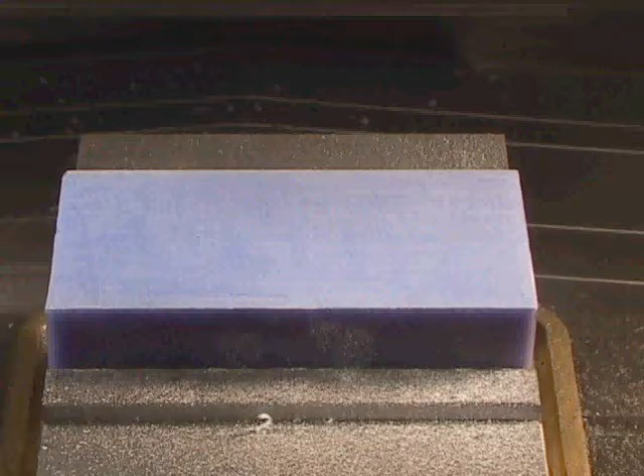I'm standing in front of a Fryer 3-axis CNC milling machine. This is a large machine. I'm standing 10 feet away just to soak it all in with this camera. We'll be examining different parts of the machine right now.

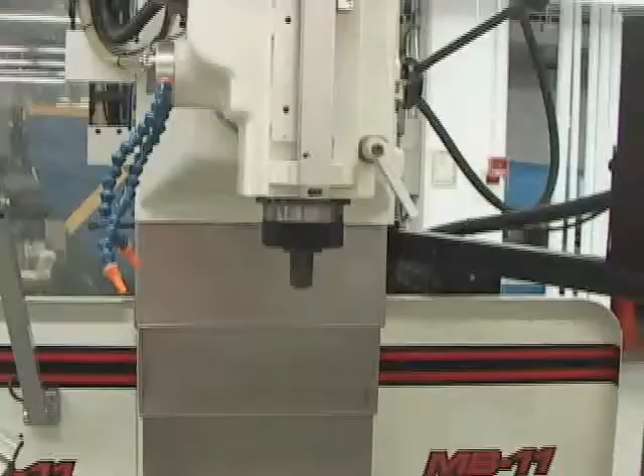This is the spindle where the cutting tools are mounted. This is the part of the machine which rotates. It's all attached to the Z-axis and it can move vertically up and down. On the side of this spindle is a gray handle which releases something called the quill. This black handle moves the spindle up and down when you want to use the milling machine as a very accurate drill press. Otherwise, you rarely use the quill feature.

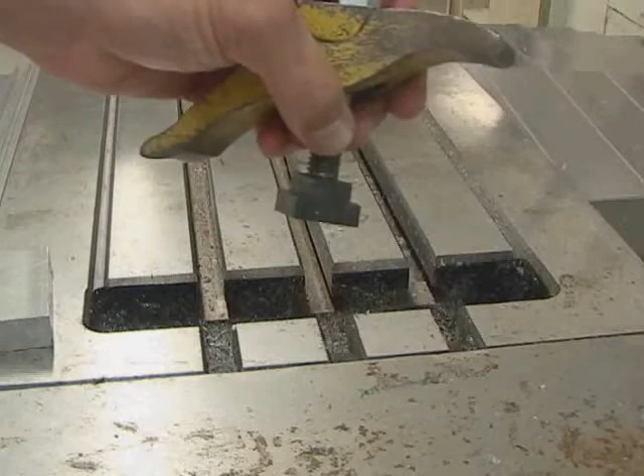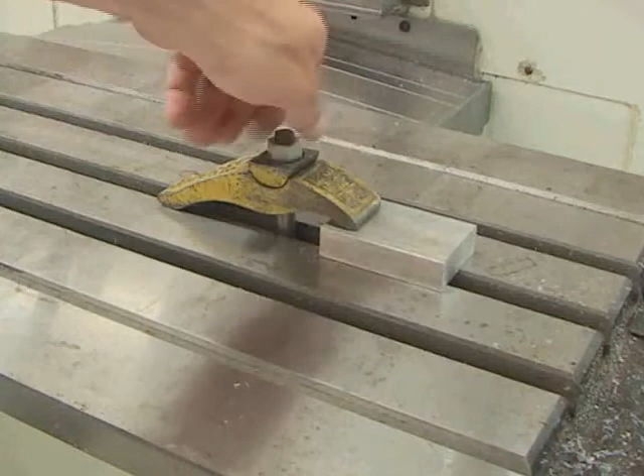When you want to clamp a part directly to the tabletop, you would use something called a table clamp. It's attached to a T-nut, it slides into the slot, and it can be used to clamp down an object. You would need at least 2 of these. Keep in mind, it is possible for the milling machine to cut into its own table. There is no safety feature built into the machine to prevent that. The vise is also a very commonly used device for holding objects in the milling machine, and we will be making use of that all the time.

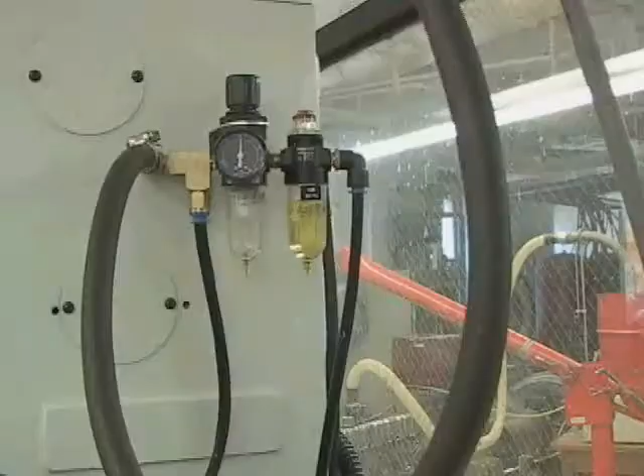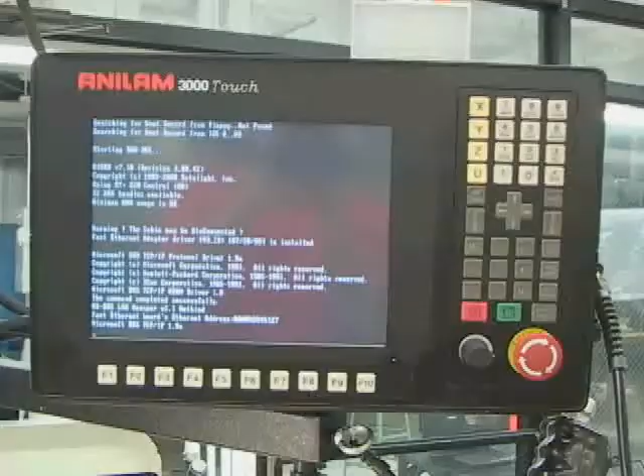In the back of the machine is an oil system which pumps oil to lubricate the ways and bearings of the machine. There is also compressed air used to do tool changing, and of course electricity is the main power source. To turn on the machine, you turn the gray knob in the back and the red knob on the side inside the yellow square. When the machine comes up, the Anilam 3000 touch-sensitive liquid screen powers up. It's filled with many user buttons which we will discuss later.

One of the first things you'll have to do is power on the servo motors. You first have to make sure the emergency stop is not activated by twisting it to the right. It will pop out, and then you push the servo reset button to reset the servos. At this juncture, you will have to hit the home button, the F4 key, and the homing process will take place. Sped up, you will see the Z-axis goes all the way to the top, the Y-axis comes all the way at you, and the X-axis goes all the way to the left. At that point, the machine will read X, Y, Z, 0.

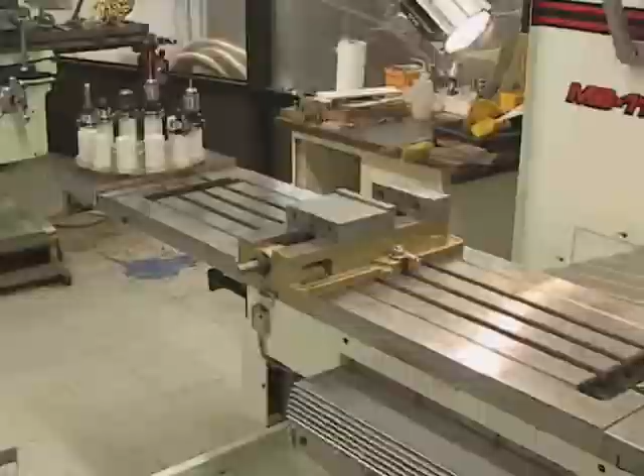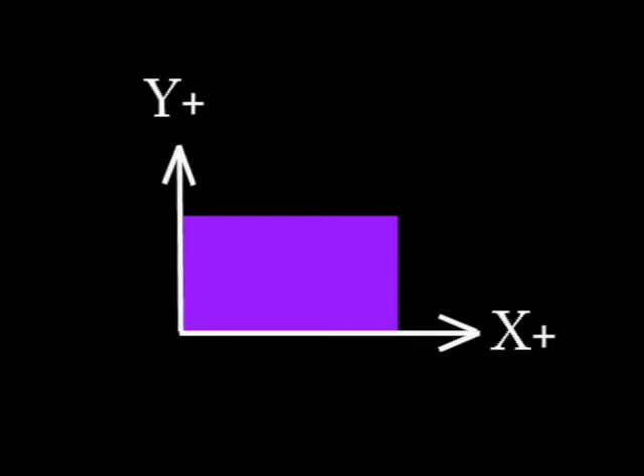Before describing how to actually move the CNC axes, let's keep in mind that the machine is designed so that the table makes X and Y movements, while the Z-axis makes the up and down movements. Thinking of the table moving around is extremely confusing. We will therefore pretend that the table is stationary and the spindle makes all the movements. With this assumption, the familiar Cartesian coordinate system will remain in effect, and these XY axes can be thought of as being directly on top of the CNC table. In this way, your programming will be made much, much easier.

That's a positive X movement. Why? Because the spindle appears to be moving to the right. X negative, Y positive, Y negative, Z negative, and Z positive.

To go over the motion of the machine again, and to show you the difference between line moves and rapid moves, we have zeroed the machine on that corner, and it is now going to make a 6-inch rapid move to the right. Positive 6 inches. Why? Because it looked like the spindle went to the right. Thinking of table movement will drive you crazy. That's Y positive 2.5. And this is a rapid move back to 0, 0.

These moves are made by entering them onto the keypad by selecting rapid and then entering the coordinate you want to go to. This is now a line move from X equals 0 to X equals 6. Remember, the spindle is moving to the right, positive 6. You have to enter a feed rate. Here it is 20 inches a minute. Rapid moves are used to rapidly go with a tool to start cutting, and then you switch to line moves to actually make a milling cut.

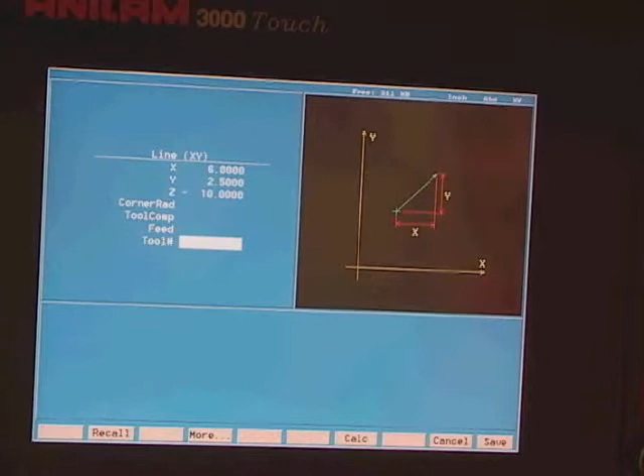I'm now going to enter a line move in 3 directions at the same time. You push the line button and up comes the line menu. I'm going to enter x equals 6, y equals 2.5, z equals -10 with a feed rate of 20. Z -10 will bring the z-axis up because it's right now around -16. When executed, you need to push the execute button.

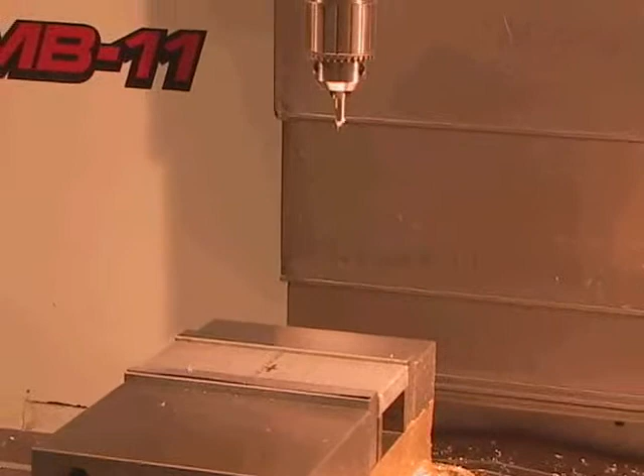The tip of this drill, sped up, will sweep out a space diagonal. It is complex three-dimensional movement like this which makes milling 3D complex geometries possible.

Okay, I just want to show once again using the pulse generator. It's really simple. You click that to the x-axis if you want to move it. With this in 100, every time I move this, it moves 1/100 of an inch. Every time it makes a little click, and you can make very coarse movements with this. If you reduce it to 10, it moves 1/1000th of an inch every time. It's moving very slowly now, and believe it or not, you can move it in 1/10,000th of an inch increments.

The same thing is true for the Y. And if I select the Z, I can move it up and down. This is one of the most useful ways of moving the axes.

This area here, there are jog buttons. Now, jogging in the middle, there is a button that has a hand on it, and that's for hand movement, jogging. I'm going to hit the jog button, and every time I hit the jog button, next to the word jog, it says 1. I hit it again, it says rapid. I hit it again, it says feed. I hit it again, it says 10.

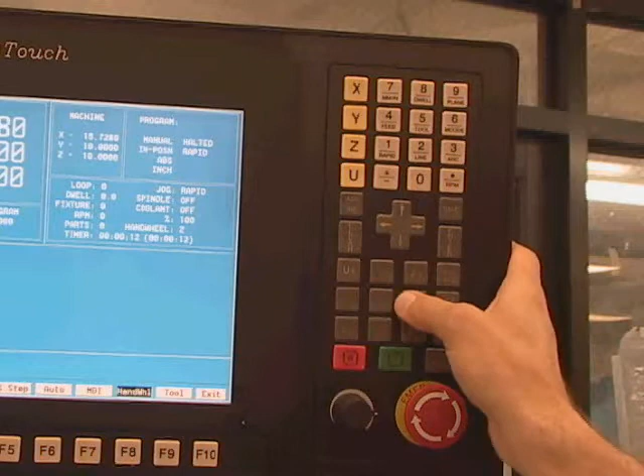Now I'm in inches, and a movement of 1 would be 1/10,000th of an inch. A movement of 10 would be 10,000ths of an inch, and a rapid will just go rapidly. So for example, in rapid, if I hit X positive, it will go positive. X negative, it will go negative.

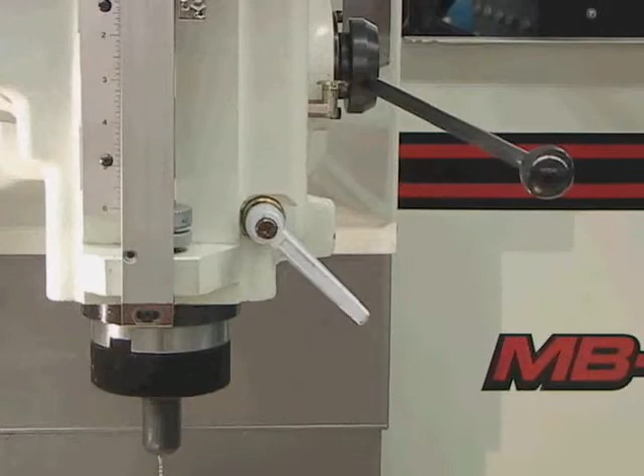Let me discuss how to remove a tool from the machine. The first thing we're going to notice is the quill on the side. The first thing we're going to want to do is to make sure this handle is up and unlocked, and make sure the quill is all the way up. The tool will not come out unless the spindle is all the way up. Now we're going to just lock this down.

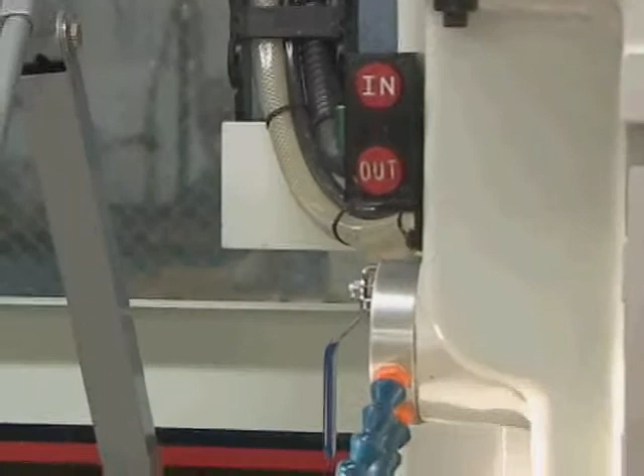The next thing we're going to focus our attention on are these in-out buttons that are located right above the spindle on the left side. Notice there's a green button on the outside and an in and out red button top and bottom. To remove the tool, you push and hold in the green button while hitting the out button. Now you'll hear the air pressure when you do that.

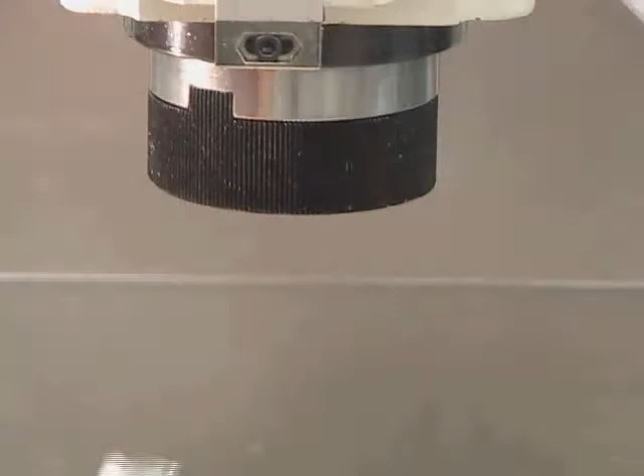Now let's focus in on the spindle. When I hold in the green button and the out button at the same time, the tool is going to come out. I notice that the spindle is dropping there. When the tool comes out, I'm free now to change tools.

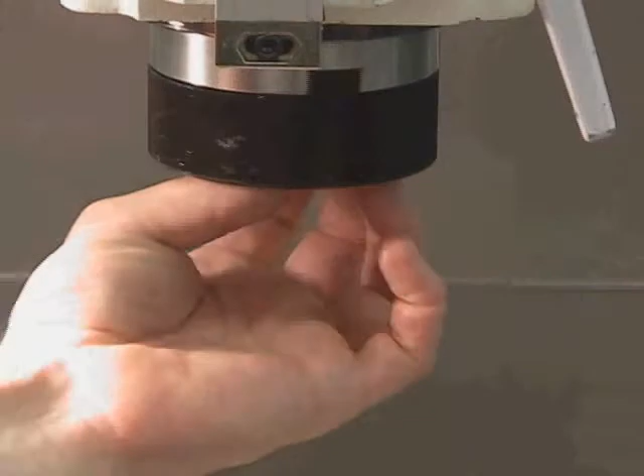Now notice, there are notches here, and in here there are also a corresponding set of notches. Now to put the tool back in, you have to rotate this around until it fits into those notches. Then you hold the green button in until the tool is back in there.

This particular method of tool changing is called the power drawbar system. It is a manual tool changing method. However, it is fairly quick. And the part of the machine that has the power, this is where it is. The power drawbar system, that is the part of the machine which does the tool changing.

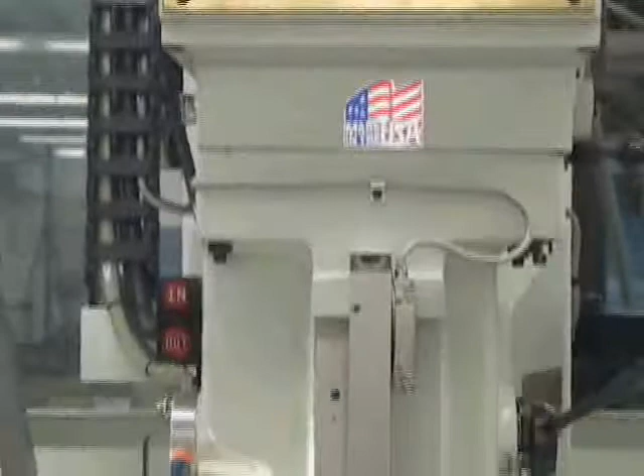Now, you're probably all familiar with the vise, but this particular vise has this handle that opens and closes the vise. It is held into the table with these T-nuts. Again, we're using T-nuts that have threads coming out of them, and the screws are tightened with the same handle as you would tighten the vise with.

Chips often get inside a vise, so if you're using a vise, it's very important, if you want accuracy, to make sure the inside of the vise is extremely clean. We do have an air gun mounted onto the side of this machine. Here's the air gun. It blasts compressed air. You don't always want to use a compressed air gun, but it can be useful. Never play around with these in the shop class.

Typically, when you use a vise, you would put a piece of metal in the vise like this. However, you never know if the metal is angled this way, or potentially it could be angled this way. And if you want it flat, you use these precision ground pieces of metal called parallels. Now we have sets of parallels. They come in many different sizes. You have to select one that's appropriate to your machining task.

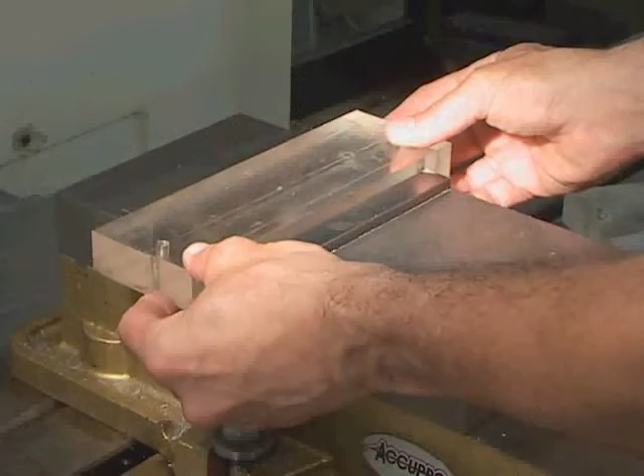Okay, I'd like to describe to you exactly the method by which we're going to make these nameplates. We've created a jig to be used in the production of these nameplates, and this is the way the jig works. It's quite simple. This is the bottom part of the jig, and it's going to go into the vise. Now I just want you to take note of how this one corner differs from the other corners, and I'm going to discuss that in a second. But basically, this part of the jig is going to go into the vise, and it's going to stay there for the entire class.

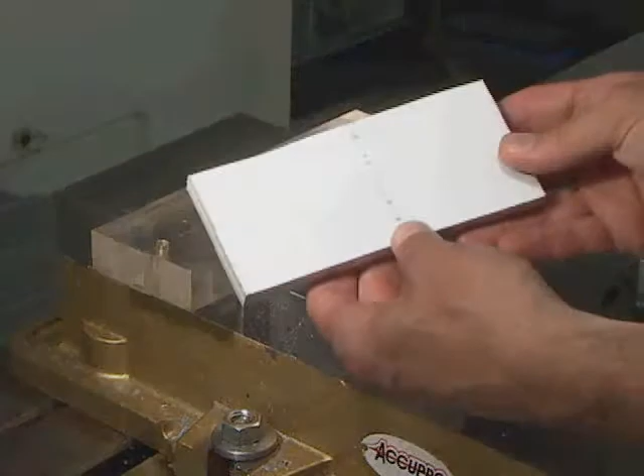The next thing that's going to happen, and I think I mentioned this to you already, is this is the blank. Everyone in your class is going to be given one of these pieces of aluminum. It is approximately 6 inches long and 2.5 inches wide, and it's about 1/2 inch thick. What you're going to do is tap 2 holes, 1/4 by 28 threads, exactly 4 inches apart, directly centered on the bottom of this plate. That's the first thing you're going to do.

And then what's going to happen is this. You're going to screw your nameplate onto the top of this jig. We'll tighten these screws. Then this particular plate with your nameplate on it will be put on top of the secondary plate, and it will be clamped on or screwed down with these screws. Now these happen to be called Allen cap screws. They take a special sort of hexagonal wrench to tighten them, and you've probably seen them before. And these will be tightened like this. Once your nameplate is down on the jig, these screws tighten below the surface of the bottom of the jig.

They'll come down like this, and we will be free to machine all the surfaces of this plate while making your nameplate. So we'll be able to, for example, change the shape of this rectangular block into whatever we want, really. And the only thing you have to appreciate is that to cut all the way around your piece and complete the profiling, we're going to have to cut a little bit into this jig. That's okay, because these screws go below the surface, and they were made to do that. And we won't go too far below, but while we're profiling out your nameplate, we will actually cut into the plexiglass a little bit.

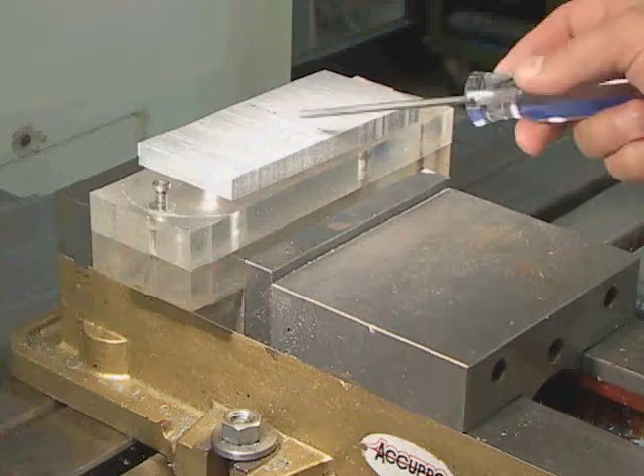Now, the reason why we've made the jig like this is as follows. After you make your nameplate, one of your fellow classmates will want to make his or hers. Now, from this corner of the jig, we will set our 0, 0 of our CNC machine, and everything will be referenced from the same corner. And therefore, when we take out your nameplate and replace it with someone else's, we will not have changed our XY0, and we won't have to go through the somewhat time-consuming task of re-establishing the corner of the piece every single time we change plates. So that's the philosophy of this jig.

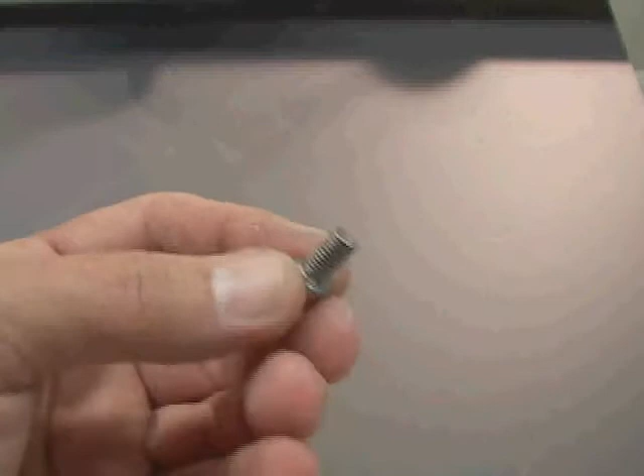Now here are the Allen screws I mentioned that are on the jig. And this is what's going to hold the nameplate down to that upper plexiglass plate on the jig. This is an Allen cap screw. You can tell because it has the hex. It uses an Allen wrench. The hex is in here. And it happens to be what's called a 1/4-28 screw. Now what that means is the screw is 1/4 of an inch in diameter, and it has 28 threads per inch. So if you could count these, there'd be 28 of these per inch.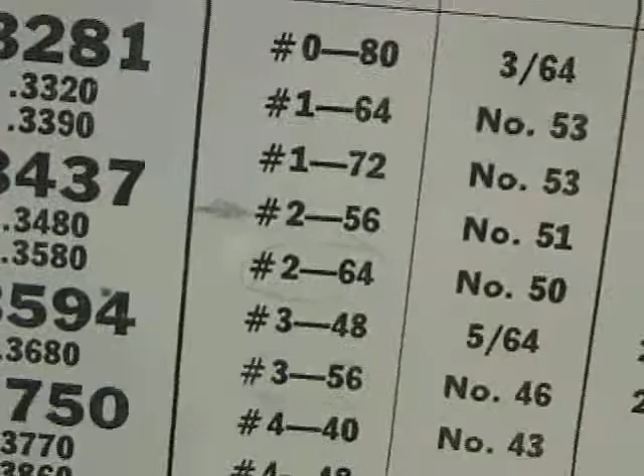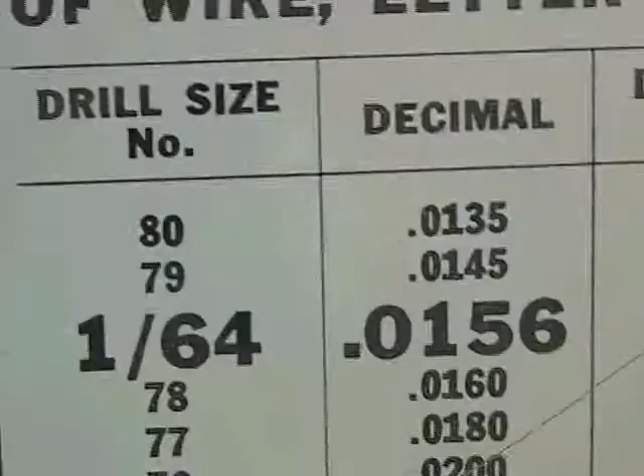We must tap a 1/4-28 hole, and in order to do that we need to determine the drill needed to make such a hole. We consult the drill chart and see that the 1/4-28 hole requires a number 3 drill. This chart also gives you the actual diameter of these drills. Drills are listed as number drills, fractional size drills, and letter drills. All the information you need is contained in the chart, but the important thing to know is we need a number 3 drill, 0.213 inches.

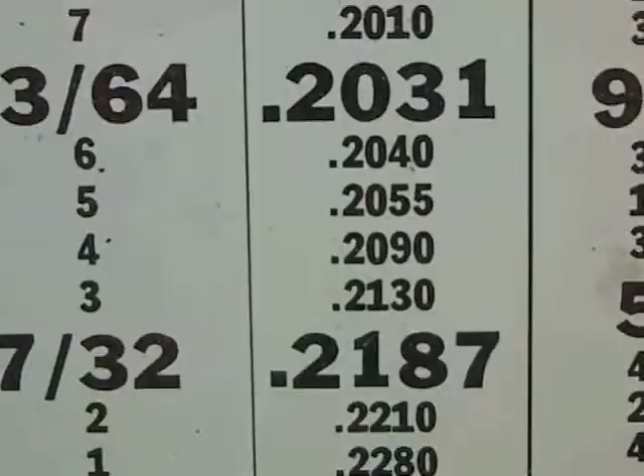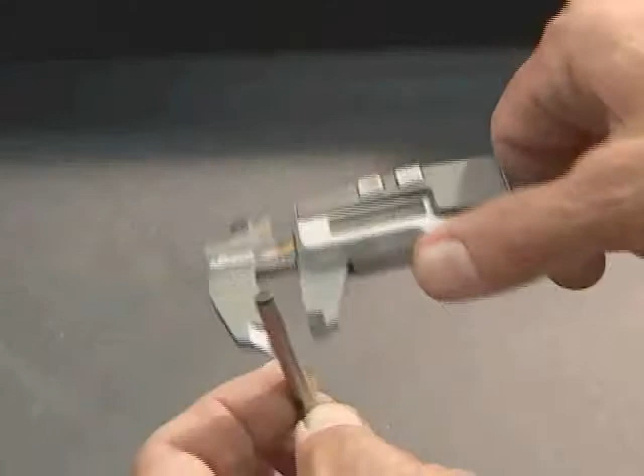But let me just say, when you pull it open, you see the jaws underneath open up. This one's a digital caliper, so it gives you a digital readout. And we can use it to measure the diameter of this drill. So I'm going to grab the shank, and it's measuring about 0.21 here. You can also measure the tip if you want, and it measures about 0.212. Now that we have the caliper out, let me just go over it a little bit.

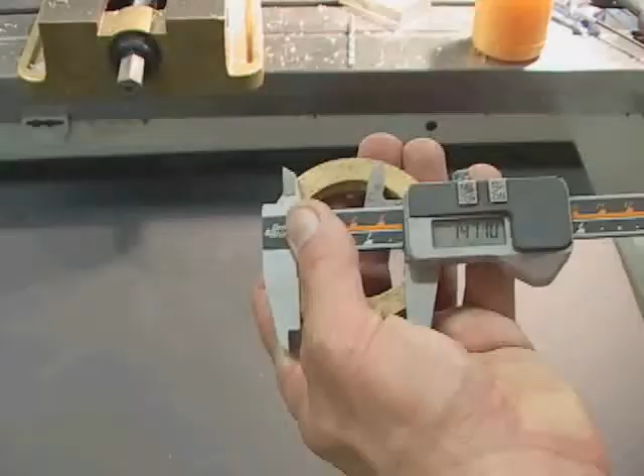It can measure the outside diameter down here below with these jaws, and if you look at the top part, that can be used to measure the inside diameter. On the other side of the caliper, as I pull open the jaw, this rod comes out the bottom, and that can be used to measure the depth of a hole. So this little device here, and this might be how you would use these outer jaws to take an inside diameter measurement. Okay?

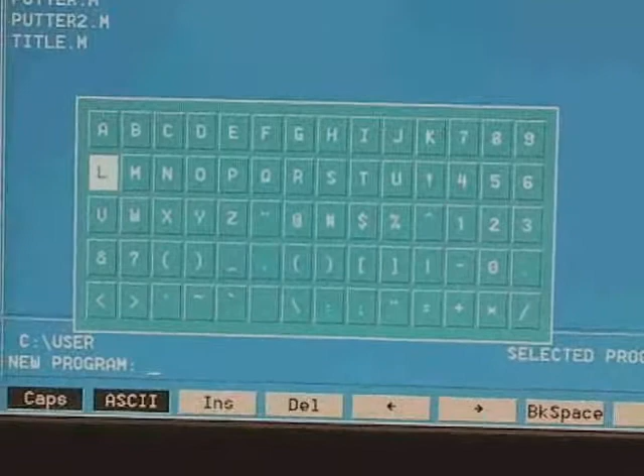To prevent oil from being constantly pumped into the machine, we should turn off the servo motors by pushing Big Red. To write a program, you must hit the Program button, and then hit the Create button, and then the ASCII key. And up comes a little ASCII touch-sensitive keyboard, and you can type in a name of a program. I am typing in the name Drill. After typing it in, you hit ASCII again, and when you hit Enter, you will notice that on the screen will appear your new program, Drill.m.

You must select it with the F6 key, and then hit F4 for Edit, and you can start writing your program. Notice at the very top, the program appears in a very small font size, Drill.m. All these programs have .m's. And below is the last line of all programs, the end of program line. That's sort of a generic line that is popped onto the end of all programs.

The first thing we're going to do is hit the number 7 key and select our units. I'm picking inches. The plus sign will toggle between millimeters and inches. The next thing we're going to do is pick absolute coordinates. Again, the plus sign will allow you to pick incremental, but we will select absolute.

The first thing we're going to do of any significance is a tool change command. When you hit the number 5 key, up comes the tool change command. We are going to ask for tool number 1, and the M code is M6 for tool change. That will be our spot drill.

After making that tool change, I will want to start the spindle spinning clockwise. The M code for that is M3. And after that, I will select the RPM with the period button and select 1000, which is a good RPM for drilling. So slowly but surely our program is starting to form.

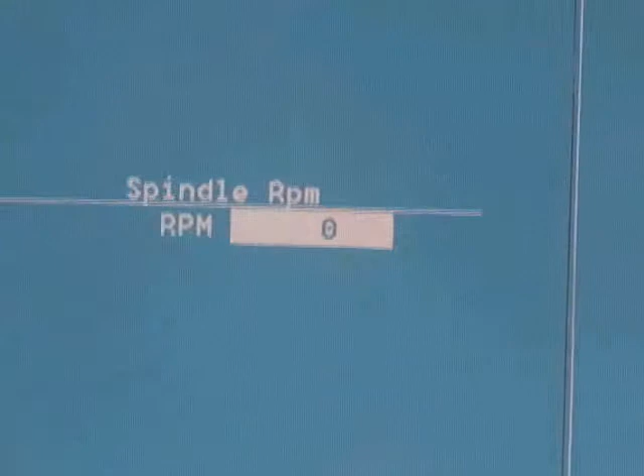After selecting the tool, I'm going to rapidly move to the start point of where I want to drill. So my first hole is at x -2 because the center is 0, 0, y 0, and I'm coming down to the coordinate 0.1 in the z direction.

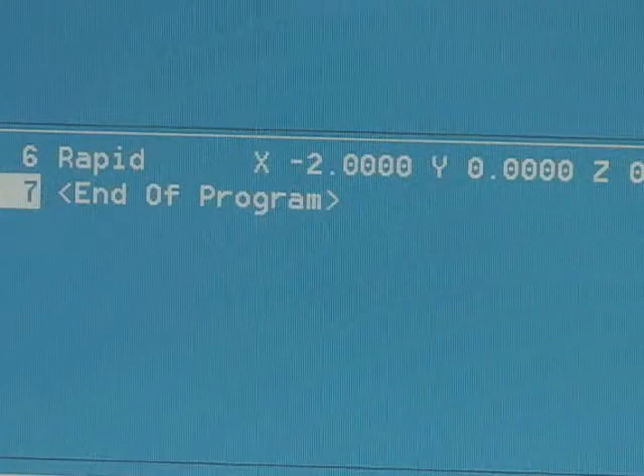We're now in a position to start drilling, so I hit the drill menu, and I'm going to select the kind of hole I want to drill first. That is the philosophy of how this machine works. I select basic drilling because this is a simple spot drill. And there's a little picture that diagrams how the drilling process will go.

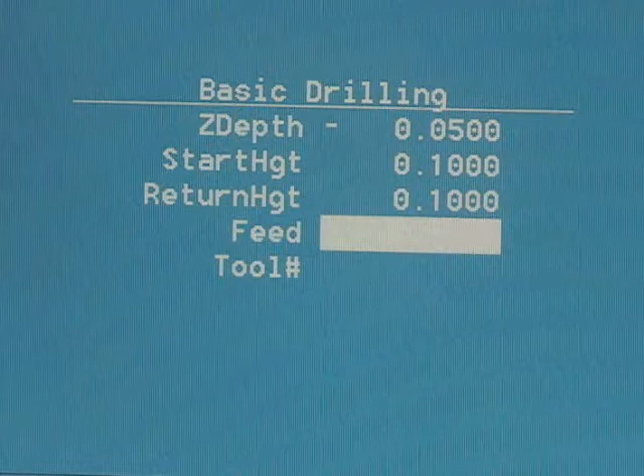We're going a depth of -0.05. Our start height will be 0.1. Our return height will also be 0.1, and we'll feed slowly to be conservative at 2 inches a minute. When we enter this line, all the information will appear.

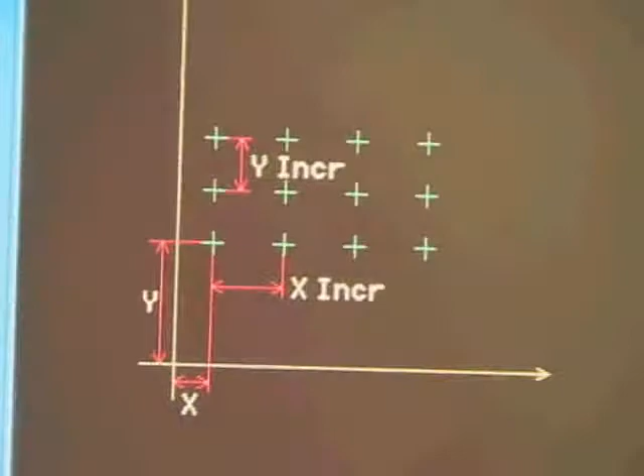The next thing we want to do is re-enter the drill menu, and we will select pattern. Now we only have to drill 2 holes, and I could simply put in the coordinate information of those 2 holes, but to show capability of the machine, we'll bring up the drill pattern menu. And here we are in a position, if we wanted to drill hundreds of holes, but we only need 2.

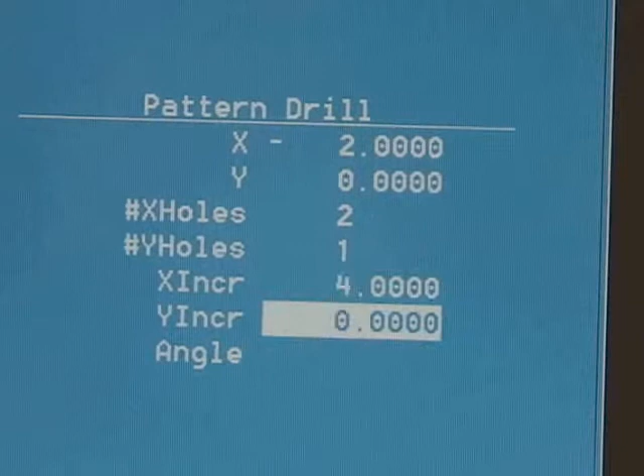Our first one is at -2, 0. We have 2 holes in the x direction and 1 in the y, and the increment in the x direction is 4 inches. So it's kind of a lot of work for 2 holes, but you get the idea.

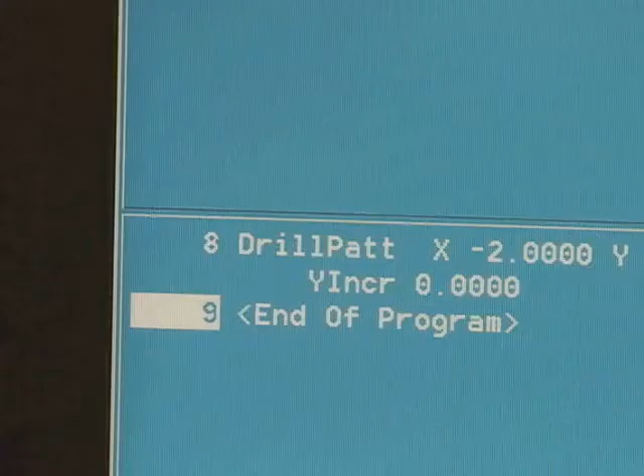After entering this command, we are in a position to check to see if we are programming correctly. Now all the information we really need is there. It's going to do the basic drilling described on line 7, and it's going to apply it to the pattern of holes described on line 8 in our program. And again, that's the philosophy of the machine. To check our program, we'll hit the draw button, F2.

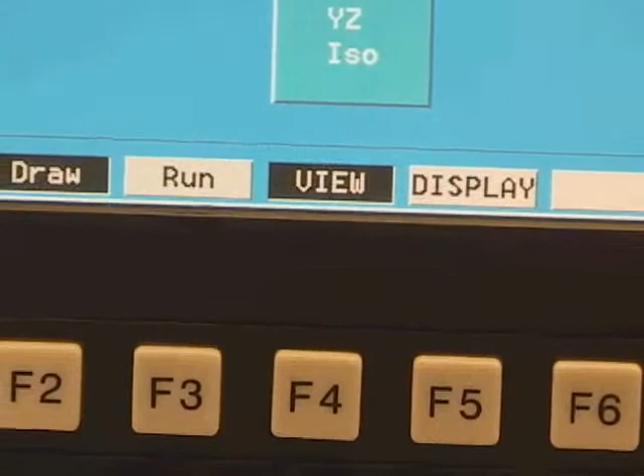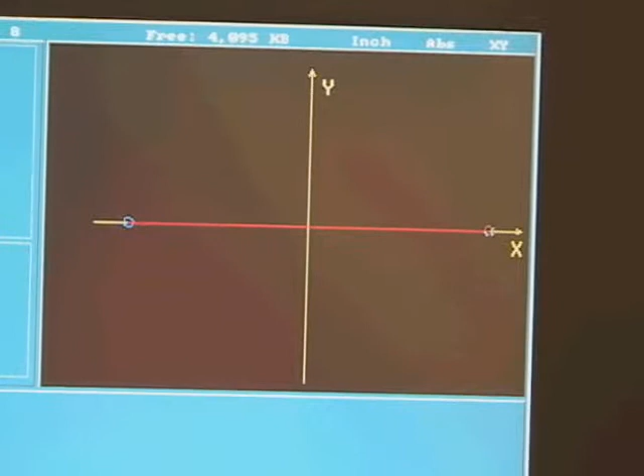Once the draw button is hit, there are a couple of options under the draw menu, and one is to select the view, and we will select the XY plane, which is a top view, and the display we'll hit fit, and up on the screen you can see the 2 holes that will be drilled, one at -2 and the other one at +2.

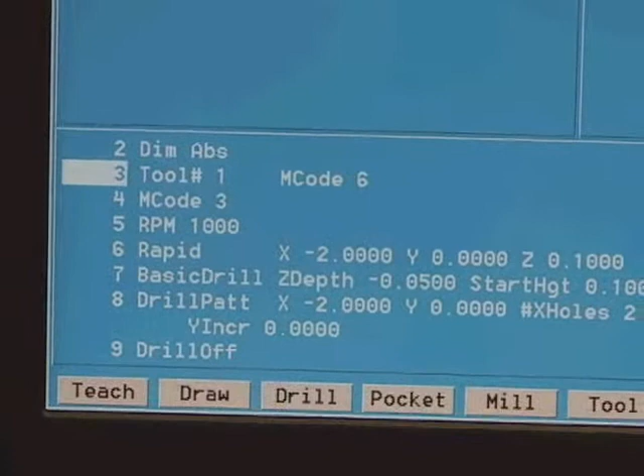The next thing we must do, at the end of all drilling operations, you must enter what's called the drill off command. It tells the machine to stop drilling. So that's necessary as well. Now the second hole is almost exactly like the first hole. So by copying and pasting lines and then editing them, it'll make life easier.

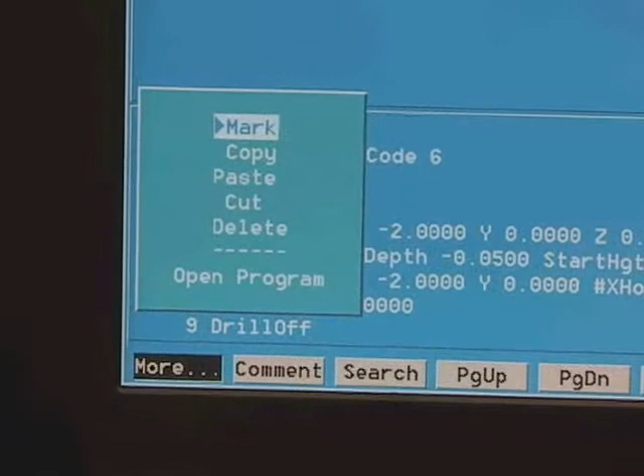Now copying and pasting is a little weird on this machine, so you must get into the menus you've just seen, hit the More button, and bring up the mark line. When you enter the mark line, it will allow you to highlight the lines that you wish to copy. This is somewhat of an archaic programming method, but nonetheless it does work.

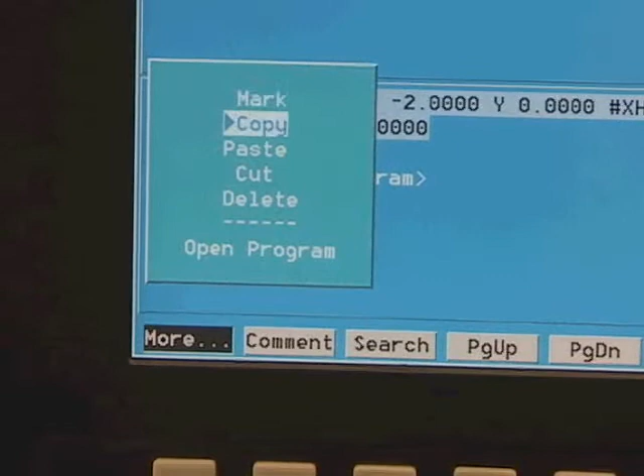We are going to highlight lines 3 all the way down to line 9, the drill off command. We're going to copy and paste it, and then we're going to edit it for our second drilling operation. You hit More again, and it will bring up the copy command. So we'll select copy next, and when you hit enter, notice it says block saved.

Now all we have to do is move the cursor down 1 line, and then we will select the paste command, and all those lines will be pasted above line number 10. So we hit More 1 more time, go down to paste, hit enter, and we have copied the blocks of programming to the next line.

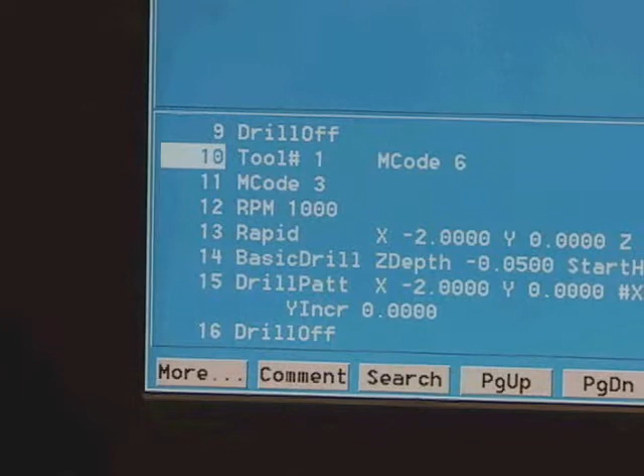So as you can see, you have tool number 1 to the drill off command, and then tool number 1 once again to the drill off command. We're going to enter line 10 so we can edit it, and we're going to change tool number 1 to tool number 2. Now this will be our number 3 drill, which will be used to drill the hole for the quarter 28.

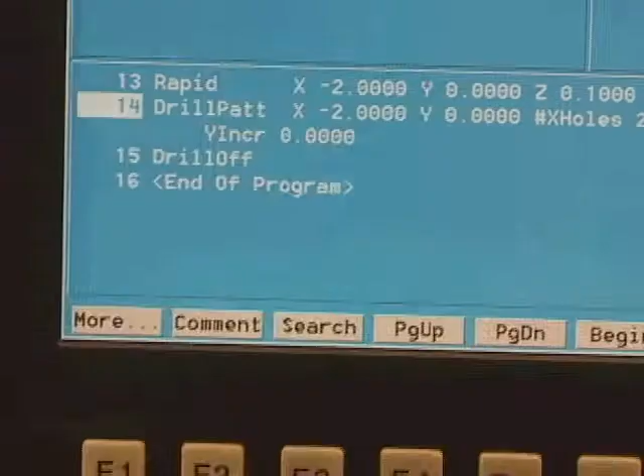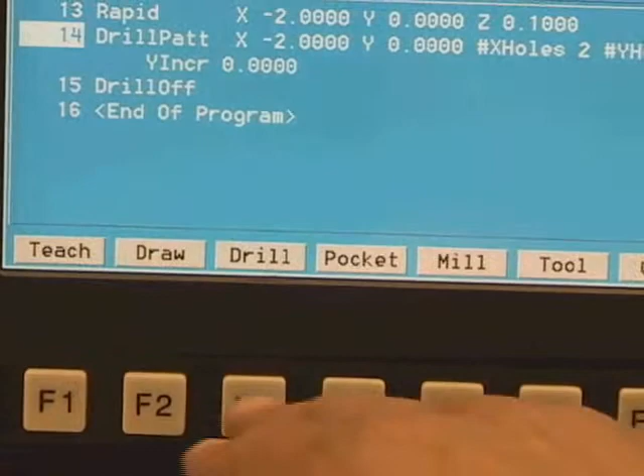Now everything else is reasonably good, but to show the capabilities of the machine, rather than do a basic drilling operation, we're going to use a pecking drilling operation. So I'm going to go to 14 and hit the clear button, and that erases that line. And now I'm going to go back to the drill menu, and this time instead of selecting basic drill, we will select what's called pecking.

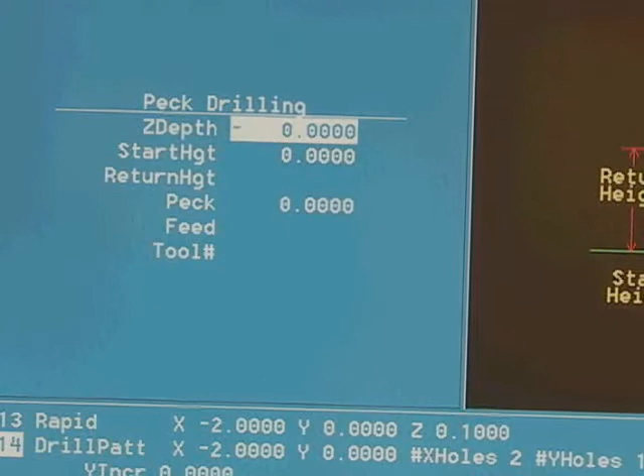Now pecking is a cycle that's normally used for deep hole drilling, and the idea is like a bird pecking at its feed. The drill bit will go down to the depth you program it to, but it will do it in little pecking increments, each time bringing the drill out and clearing the chips from the hole. And I'm entering the pertinent information.

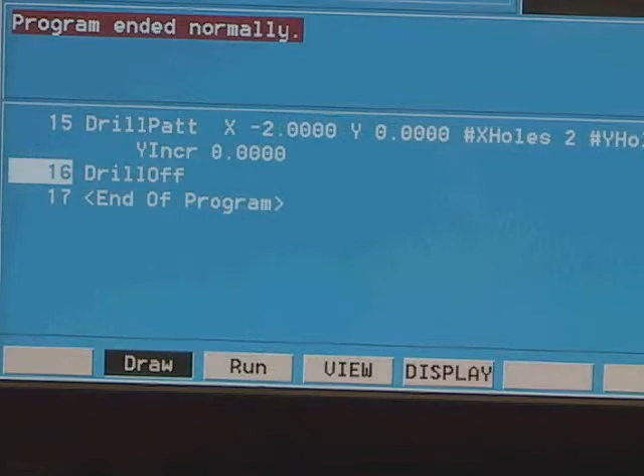We're going down -0.375. The start and return height are the same, and I'm going to pick 0.1 pecks. So it's going to peck 3 0.1 pecks, and then the final peck will be 0.075. So it will make 4 pecks for each hole, which is a bit ludicrous for a piece of aluminum, but again, just to show you the capabilities of the machine. And again, we'll select a feed rate of 2. And basically our entire program is done.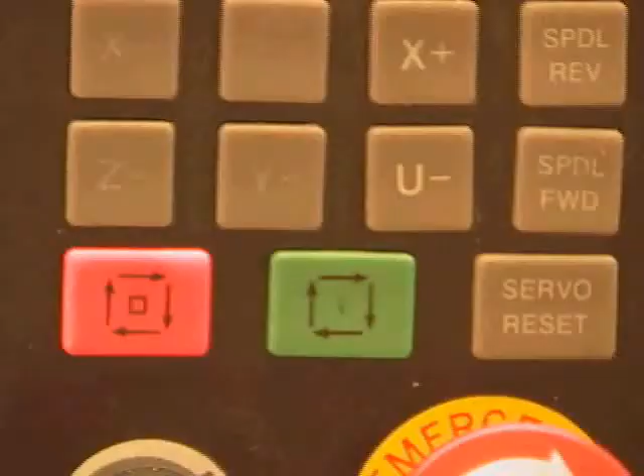Before running our program, it is necessary to obtain the tool offsets. Now when the machine is first homed, the tool that's put into the machine is a fictitious tool called tool number 0. This is where the tool changes are made. Since we are using tool number 1, we now have to switch this to tool number 1. Having switched it by hitting the number 5 button and pushing tool number 1, we have to actually execute this command to make it happen. So we hit the green execute button, and the machine won't move because there was no movement involved, but the tool has been changed to tool number 1.

The next step is to slowly move tool number 1 down until it just touches the surface of the piece of material. I'm using a small piece of paper that I am wiggling back and forth as I slowly lower the tool down. When the paper stops wiggling, I know that I have achieved my surface touch. I now look at the machine coordinates. Now this little box here are the machine coordinates. This is what has to be entered into the tool table.

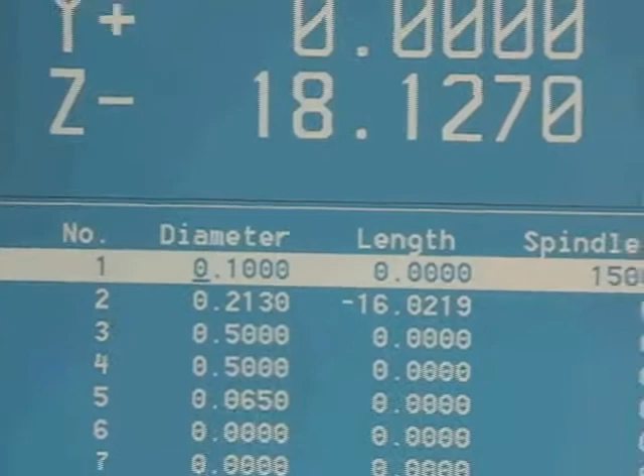You hit the F9 key to bring up the tool table, and in the number 1 line, tool number 1, we must enter the diameter and its length offset. The big coordinate information in the upper left-hand screen, these numbers there, are the part coordinates, but it is the machine coordinates which are crucially important for doing tool offsets. I enter the tool length offset. In this particular example, the two numbers agree with each other, but they typically do not.

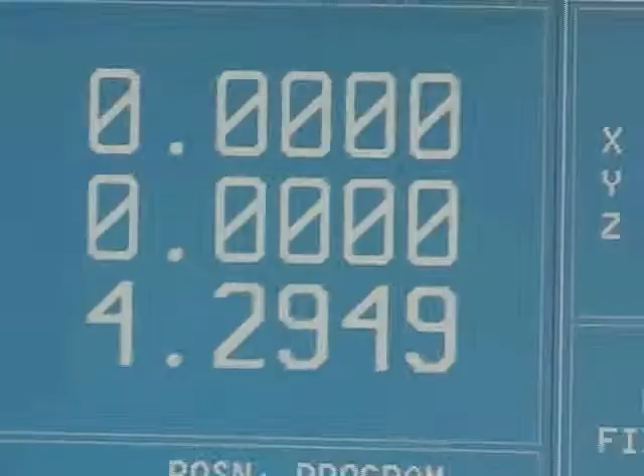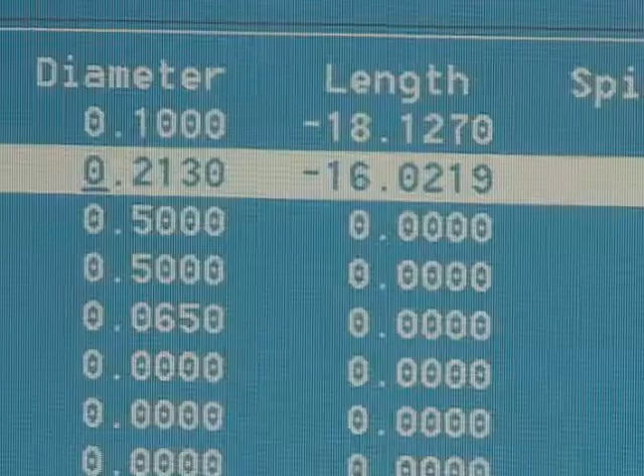Now, we must play the same game with tool number 2. So I enter tool number 2 command, and I'll have to hit execute again after entering this information to make tool number 2 come out. Now we must lower the number 3 drill onto the surface of the material, wiggling the paper as we go. You can either use the pulse generator to lower the Z-axis or the jog buttons, but it must be done slowly and carefully. Once this height is obtained, you must enter it also into the tool table.

Now notice this Z machine is negative 16.022, and the number in the tool table is negative 16.0219. This must be because somebody recently got the offset and it's just off by 10,000th. So we will make it perfect, and we will have completed entering the tool length offsets into the machine.

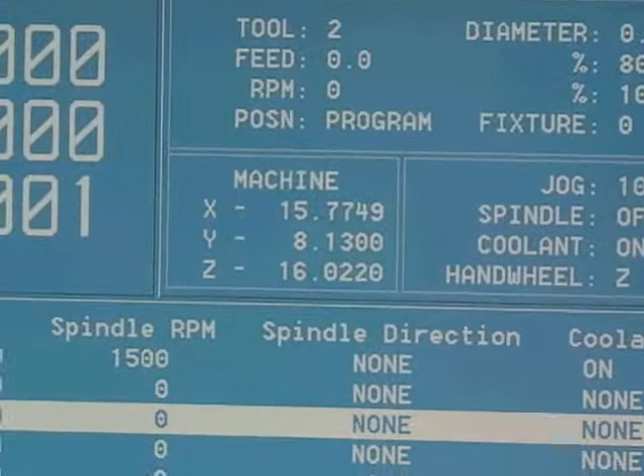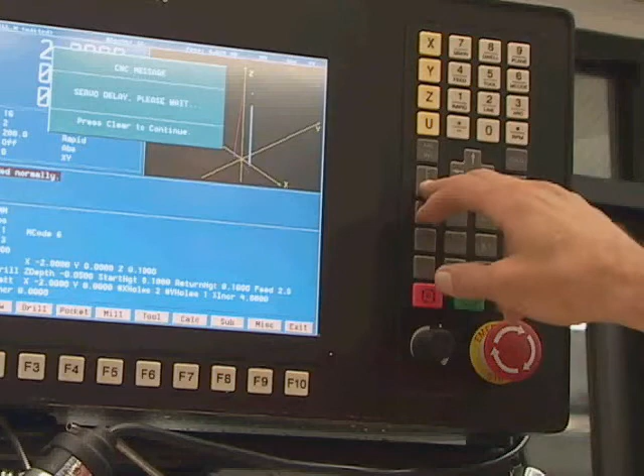Before we can run our drill program, we must turn back on the servo motors. So to do this, you twist the big red knob to the right, it pops out. You will get some messages that will come up on the screen, and you'll have to clear them. And then you hit the servo reset button. And after that, the servos will come on and the oil will start pumping again, and we'll be ready to move the axes and run our program.

Before we can run the program, we must zero the X and Y axes on the center of the nameplate. I've lowered the spot drill down to the center. I hit the X and Y yellow buttons and enter 0, and that will zero the XY axis at the center.

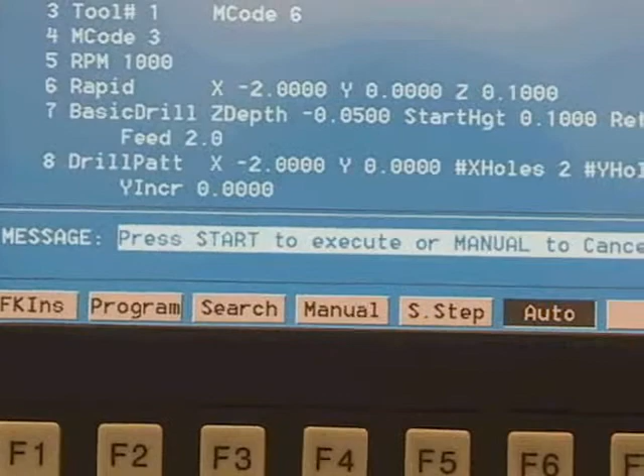To run a program, we'll hit the miscellaneous button, and that takes us to the menu that we run the program from. When you see that auto button light up, then you know you're able to run a program. You hit the auto button, and what comes up is press start to execute or manual to cancel. So we are now ready to run the program. We will hit the green execute button.

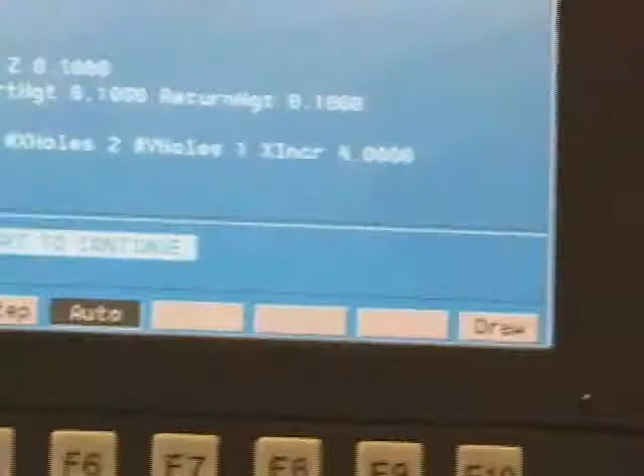Now the knob next to the big red emergency stop button allows you to crank down or crank up the speed of the pre-programmed feed rates. So every move, whether it be rapid or a feed move, can be cranked far below what it was programmed for or somewhat above it.

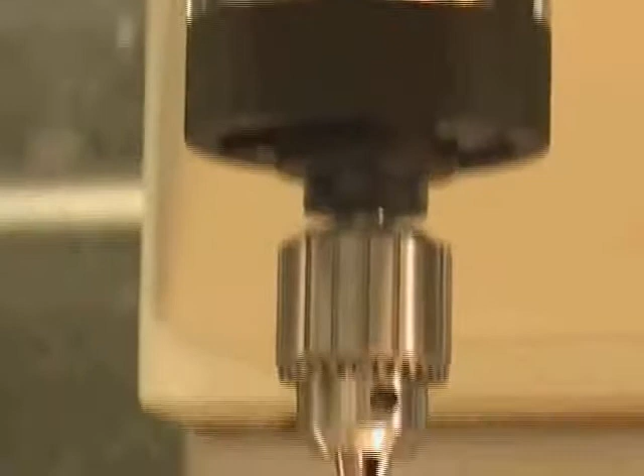Now when we turn on the program, the very first thing is a tool change command to tool number 1. Notice that tool number 2 is in the machine, so we have to switch it to tool number 1. After having done that, we hit the execute button. It cranks up the spindle just like we programmed it to, and it's going to drill the 2 spot holes. The coolant has been applied with a squirt bottle. However, coolant can be made to come out of the machine with an M8 code.

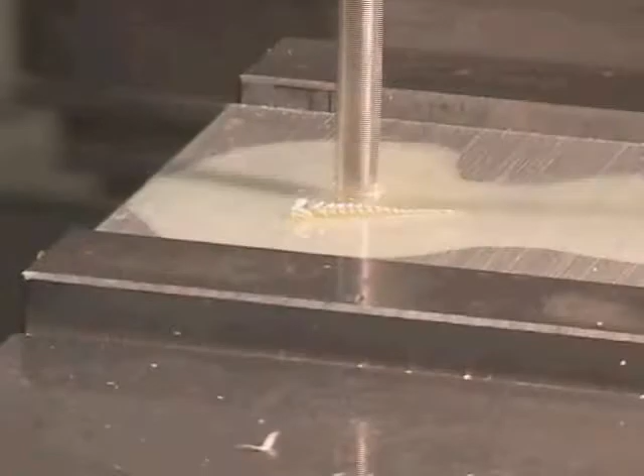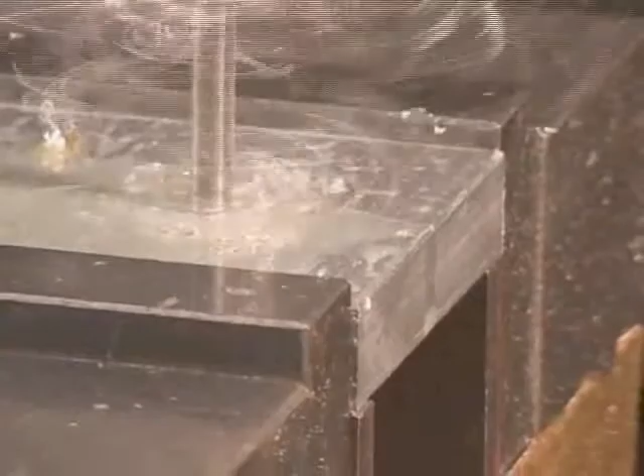The next thing is a tool change for number 2. We change up that tool and hit execute again, and the next drilling process will take place. Realize that we're now seeing pecking drill. It's a little bit different. You'll see the drill go up and down several times before completing the depth of the hole. And after it completes drilling our 2 holes, the program will come to an end, and that's all there is to it.

It's time now to tap the holes, and to make sure the tap goes in straight, we're going to use this spring-loaded tip. It's going to be put into the spindle, and then the spindle is going to be brought right on top of the hole to help guide the tap. The tap is attached to a tap handle, and we are going to be manually tapping these holes.

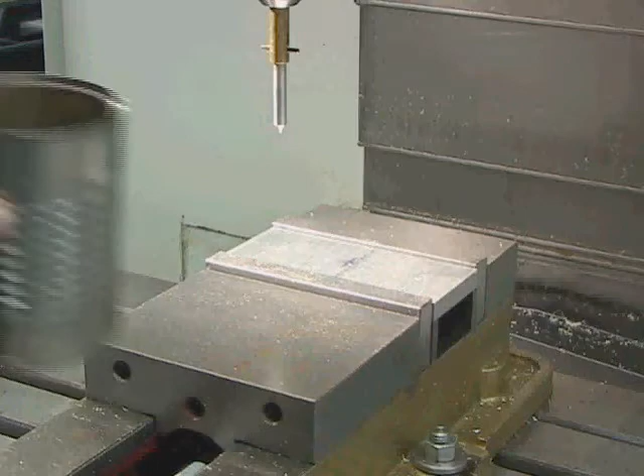It is always necessary to use tapping compound while tapping holes, otherwise you stand a good chance of breaking the tap. I should warn you now that when a tap gets broken inside a hole, it is very difficult, usually impossible to remove it. Frequently you have to start the entire job over again. We move the tip right over the hole, bring the Z-axis down a little bit to create some tension in the tip, and that will keep the tap going straight.

For tapping holes, the rule is to go 1 revolution clockwise followed by a 1/4 revolution counterclockwise. That 1/4 revolution counterclockwise is done to break off the chips. If the chips continue to pile up inside the hole, that too can lead to a broken tap. Once the tap has been started by this technique, you can finish it off by taking the tip up and just tapping the hole. Once again, when you're a novice at doing this, breaking taps is pretty common, so I'm just warning you, be careful when you tap holes.

1/4-28 is a fairly large size tap. It's not likely to break, but when you're using smaller taps you have to be even more careful. We'll play the same game on the right side, lowering the tip down, and in a short amount of time that hole is tapped too.